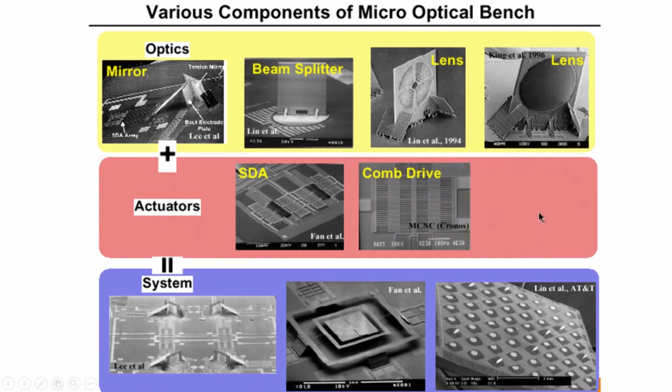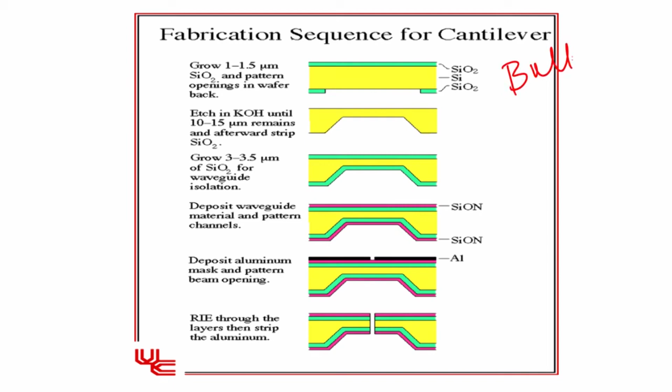So, I would like to just give you a brief idea about how such MEMS devices could be fabricated by 2 examples. This is not a detailed discussion of the fabrication, but just to give you an idea, we think of this particular method called bulk micro machining. This technique is called bulk micro machining, where the silicon wafer itself and its properties are used to achieve this function.

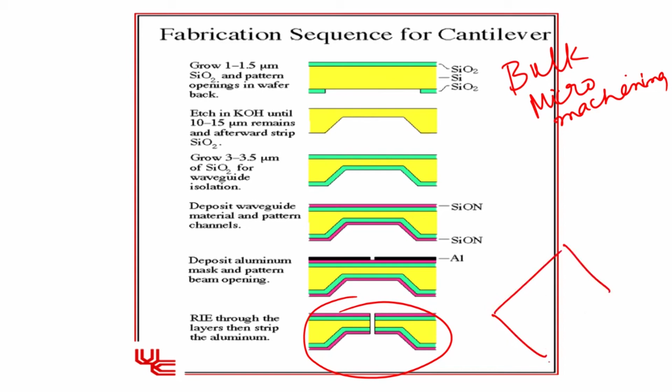So, just to give an idea, what you are seeing is a cross section of the device. Let us focus on this device. If you would like to make a 3D picture, you can say it is something like this, where, say I cut it at this point, in one portion you have this waveguide. I will draw a thin waveguide.

There is a waveguide terminating at this point, there is another waveguide on this, and the region below this is etched out here, so that this portion is removed. So, this is a floating beam as shown here. The two beams are fixed at the end, but they are flexible to move around like this.

So, by applying forces or other mechanisms, you can move this. For example, you can put a force on top of this and move this down. So, the idea here is, let us say this greenish region is the waveguide region. When the light is launched into this region and captured at the output end, based on the gap, the amount of light that goes from the input portion to the output portion varies, and if there is any misalignment between them, the amount of power that comes out reduces.

So, we can calibrate this device as a force sensor, force on one axis and the amount of light output on the other axis, and you can measure forces of the order of a few micronewtons to a few millinewtons.

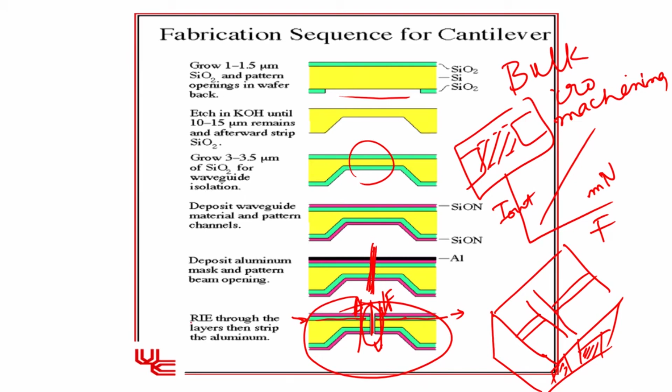So, the important feature of this bulk micromachining process is the silicon itself is used. The mechanical properties of silicon will be important, and typical dimensions are of the order of a few microns for the beam. This can be called a cantilever beam. The beam thickness is of the order of a few microns, say 20 microns. Waveguides, as you know, are of the order of a micron, sometimes on silicon wafer a fraction of a micron,

and so on. So, typical force ranges and pressure ranges that we can talk about are of the order of a millinewton to micronewton. So, this is an example of what can be called a bulk micromachining process for making optical MEMS devices.

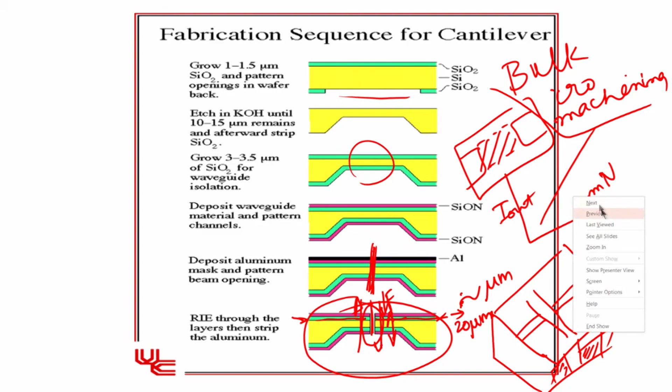I will take one more, more sophisticated method of fabricating MOEMS, called surface micromachining. In this method, once again you use silicon as the base, but the structures are made of polysilicon. So, polysilicon could be patterned such that you can have a beam and so on. You once again start with a silicon wafer, coat with nitride to adhere to the base, and then use oxide. This reddish region is the oxide, silicon dioxide, which is used as a sacrificial layer.

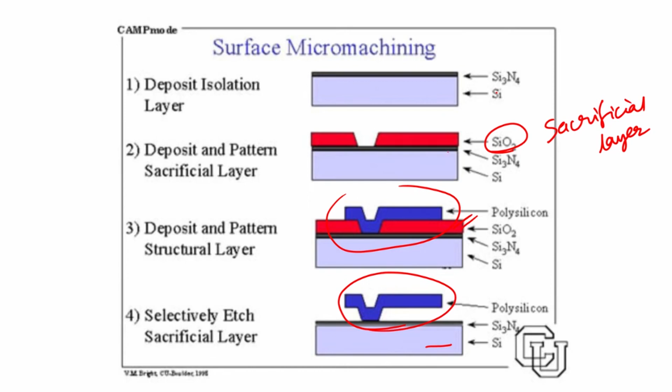To hold this poly layer on top, you deposit and pattern a layer of polysilicon on top of this, whatever shape you want, and then etch out this oxide layer. So, in a very crude way, this is the typical surface micromachining process. It repeatedly uses coating of an oxide layer and depositing and patterning several times depending on the structure. In this case, we are showing only a polysilicon cantilever beam made by surface micromachining.

So, you can make optical devices on top of this and then control their properties by deflecting these beams. You can use electrodes and electrical forces between the polysilicon layer and the base silicon wafer so that they can deflect. So, I am just using this to illustrate the surface micromachining process.

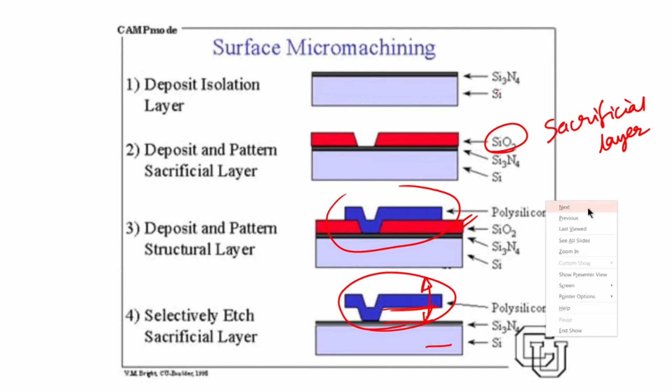So, now we see what can be called MOEMS devices combined with integrated optics. Earlier, whatever I have shown are bulk optical MEMS devices controlled by electrical signals and other ways. Here we would like to see how waveguide based optical elements could be controlled by using MEMS structures. We have at our disposal the intensity of the light, the phase, the polarization, the direction of propagation and so on, that can be controlled by MEMS structures.

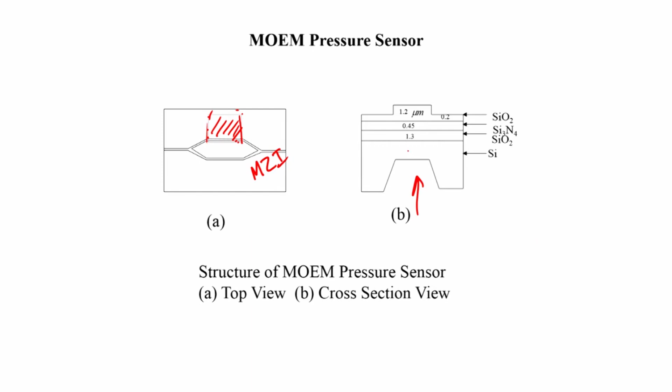Typical thickness, including the waveguide etc., could be of the order of a few microns, 20 microns, and waveguide dimensions, as you know, in silicon will be of the order of a fraction of a micron or half a micron. Typical dimension is 0.5 micron by 0.22 micron. These are typical dimensions of an optical waveguide. And large refractive index, that is another important property of silicon, of the order of 3.4. Oxides, of course, you can oxidize the silicon and you have of the order of 1.49 or so. So, these are typical parameters of silicon photonic devices.

So, this particular structure has multiple layers, a layer of oxide, a layer of nitride, a layer of oxide, and light could be guided in this higher refractive index. Nitride has a much higher refractive index than oxide, so light could be guided in this region. And this patterned structure of the channel waveguide is effectively for confining the mode in this region by effective refractive index.

So, when you apply pressure uniformly on the top of this interferometer, the stress induced refractive index change is larger here. The other arm of the interferometer is not affected much, and there is variation of refractive index in this region alone, in the diaphragm region, in particular on the waveguide region, and so there is a different phase shift between these two waveguides, which can be measured as a phase shift output at the end of the interferometer, which is converted into intensity change. So, the intensity output is dependent on the phase change at this point, typically cos square delta phi, like in other MZI structures.

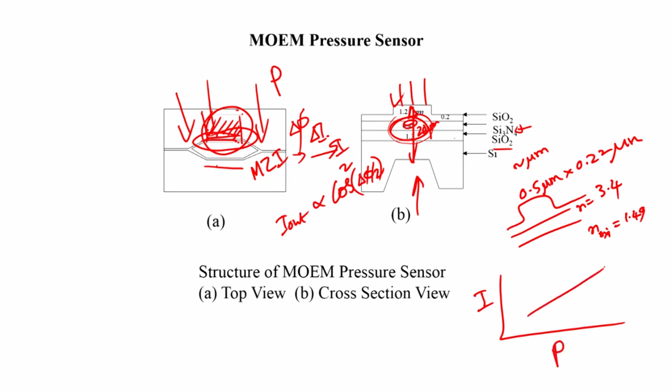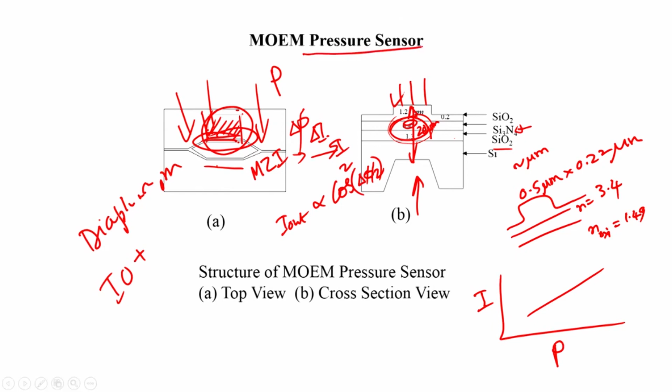So, you can calibrate this device for pressure as a function of the light intensity output. Light intensity output with the pressure, I will show a few pictures later on. So, this is an example where we use MEMS. The diaphragm is a MEMS device. The diaphragm is the mechanical device which is used to control the optical property of the light propagating inside this waveguide. We have combined integrated optics plus diaphragm for an application to pressure sensing. I will show you a few more details in the next few slides.

So, if you want to study such optical MEMS devices, guided wave optical MEMS devices, we have to deal with the mechanical equations, the optical equations, and if there are any electrical effects, electrical equations, all combined into a single unit. So, first you solve the mechanical equations of the diaphragm, then from the solution you get the stress variations induced, as we have seen in the case of the acousto-optic effect. In this particular case we are using what is called the elasto-optic effect, and you get the stresses involved.

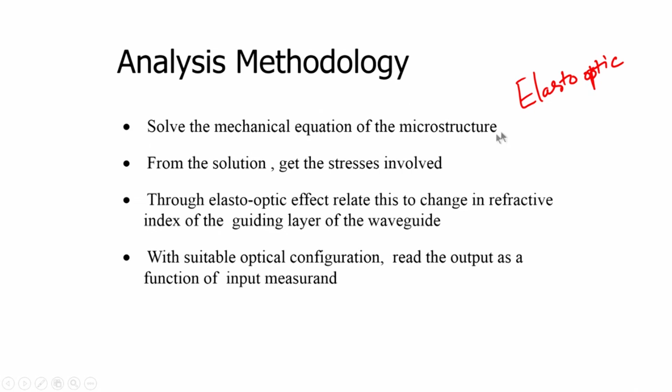Then you can relate these elasto-optic effects to the refractive index variations of the waveguide, and you can choose a proper optical configuration like the Mach-Zehnder interferometer. In that particular case, read the output as a function of input signals. This is the broad methodology. I will show a few equations to illustrate how this is being done in the case of the pressure sensor. So, this is a typical case. You can look at the current literature for more details.

You have a mechanical equation of motion. So, on the right hand side you have the pressure, this is the motion for the diaphragm, and you have been given several boundary conditions to determine the displacement function of the diaphragm, and also of course we can relate it to the stress variations of the diaphragm. So, the stress variations could be considered as derivatives of displacement.

Another important feature that is illustrated by this is that the stress variations are tensorial in nature. Even though you have uniform pressure, or scalar values of the pressure on the diaphragm, the resulting induced optical changes as well as the mechanical changes could be vectorial or tensorial in nature.

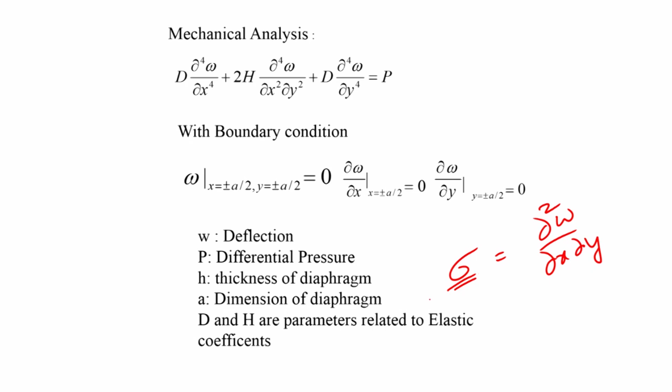So, the idea in this particular slide is to solve the mechanical equation and obtain the displacement functions and the stress variations. The stress variations are reflected in the optical properties. Using optomechanical coupling expressions, you can relate the refractive index variations with the stress variations. I am showing the stress variations as variables, with different values in different directions and different coefficients, and they are also different for the TE and TM modes of light propagation.

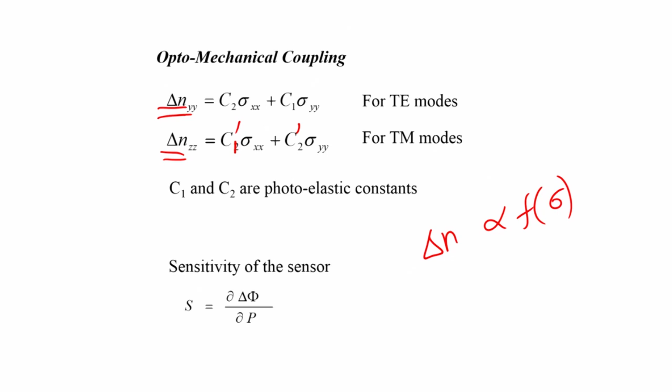The waveguides will have different coefficients. You can say that the C2s are different, for example C1 dash and C2 dash, and you have refractive index variations that vary along with the stress. So, delta n is a function of the stress. That is an important feature of these elasto-optic devices.

Finally, of course, we can define the sensitivity of the sensor as the phase shift with the input perturbation. In this particular case, the perturbation could be the pressure, which results in the change in the phase. You can refer to the current literature for more exact relationships between delta n and the stress-induced changes, which are different for different materials like silicon. Even in silicon, it may depend on the doping concentrations, which you can use to control not only the electrical but also the mechanical and optical properties of silicon junctions and wafers.

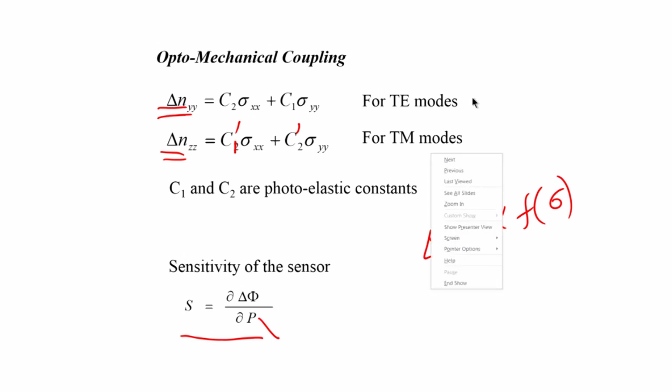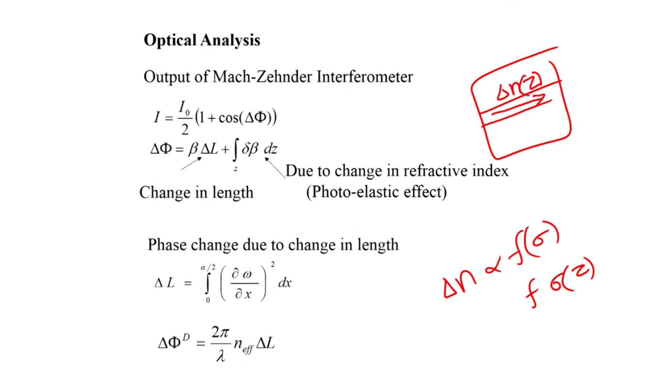So, once you get the mechanical analysis and put it into the coupling expressions, you need to do optical analysis. An important feature we noted here is that delta n, the refractive index change, is a function of stress, which is a function of z. So, if you have a diaphragm or a waveguide experiencing displacements, the refractive index varies along the z direction. That is an important feature of many of these MEMS structures. Delta n is a function of z. We have seen such analysis for tapered waveguides, branches, couplers and so on.

In this particular case I am showing you a very simple analysis for the MZI. If you are using an MZI as the optical structure, you can relate the intensity with the phase shift, and the phase shift with the changes in displacement or in the propagation constant due to the refractive index change arising from the elasto-optic effect, and finally calculate the phase shifts. The phase change due to changes in length can be estimated, resulting in the sensitivity expressions, relating the change in phase to the change in the perturbation.

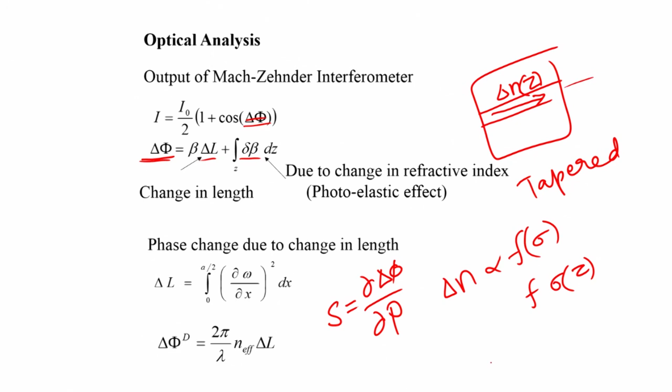So, this is a broad description of how optical MEMS devices based on optical waveguides can be analyzed. First we do the mechanical analysis, relate it to the optical properties using the elasto-optic effect, and then use optical analysis to study the propagation of light in the waveguides as a function of the input perturbation parameters and determine all the required properties.

So, to summarize, I have shown you this device, which consists of a mechanical element, the diaphragm, and an optical element, a Mach-Zehnder interferometer based on the optical waveguides we studied earlier, and interrelated them to achieve a function like sensing.